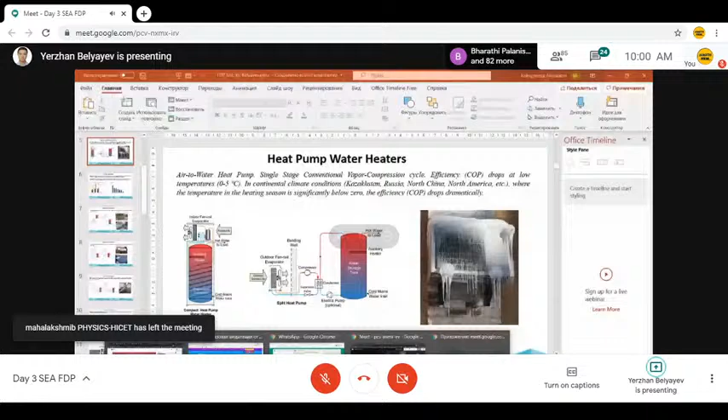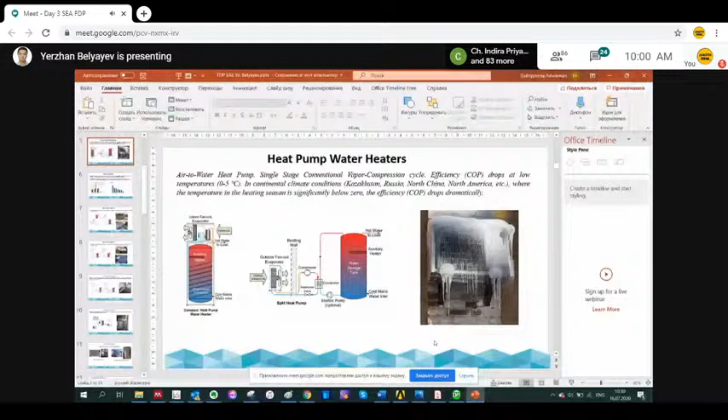Before we are starting the presentation, I would like to introduce Dr. Yerzhan. Dr. Yerzhan is an associate professor at Satbayev University, and he is also associated with Al Farabi Kazakhstan National University. He has completed his bachelor's, master's, and PhD degrees, all three from Al Farabi Kazakhstan National University, in the field of mechanical engineering, and he's an expert in turbulence modeling. After his PhD, he's done a lot of research and development activities in the field of heat pumps in collaboration with NIT Calicut and also with our institute, Hindustan College of Engineering and Technology. Initially he got funding of around 1 crore Indian rupees for the project called solar assisted heat pump.

I'll introduce you, then we can start your presentation. Initially, Yerzhan got a research fund worth 1 crore Indian rupees for the project of solar assisted heat pumps for space heating, in collaboration with NIT Calicut and also with our institute, Hindustan College of Engineering and Technology. Later, based on that research outcome, he got 3.5 crore rupees for a World Bank project to commercialize that concept, and he has done a lot of commercialization activities, though he's having some problems. So he is going to share the commercialization problems in this presentation. He also got another 65 lakhs for the development of auto cascade solar assisted heat pumps for space heating applications, in collaboration with myself, especially at Hindustan College of Engineering and Technology. He's also going to submit a new proposal on hybrid solar and geothermal heat pumps this year. So over the last 5 years he has had intensive research and development activities in the field of solar assisted heat pumps. I hope he's going to share his 5 years of research experience.

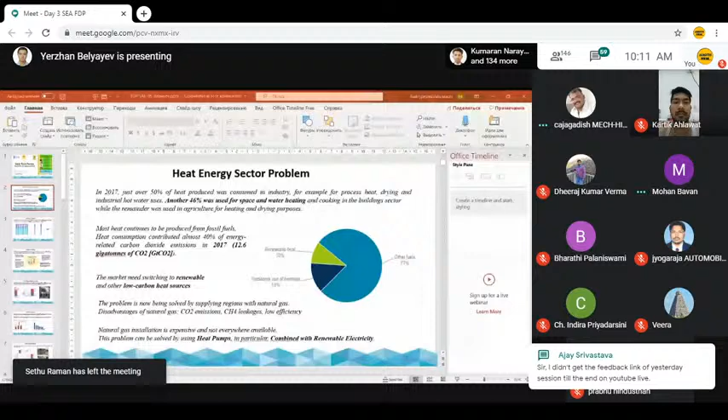According to the International Energy Agency, heat produced was consumed in industry, for example process heat, drying, and industrial hot water use. Another 46% was used for space and water heating and cooking application in the building sector. The remaining 4% is agricultural heating and drying process.

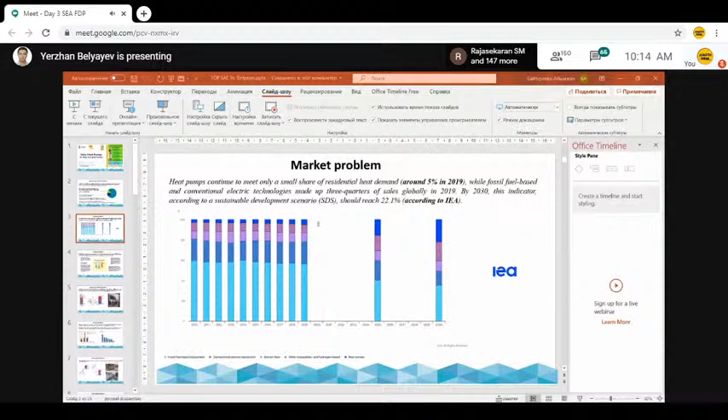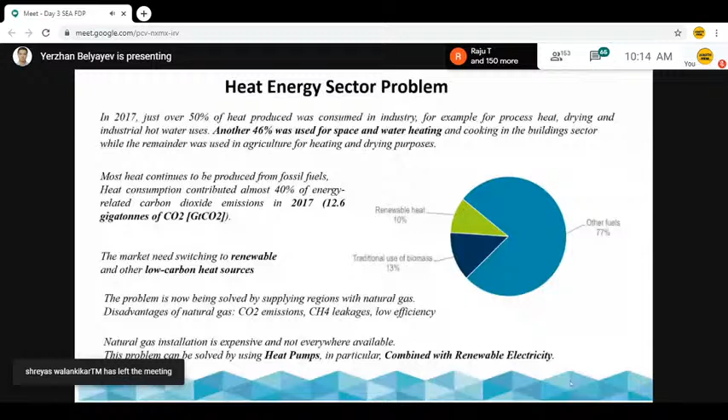So as we can see, the market needs switching to renewable and other low-carbon heat sources. As a solution in a continental climate condition like Kazakhstan, Russia, and other Nordic countries, the problem is solved by supplying natural gas, but natural gas is not available everywhere. This is a short disadvantage. The disadvantage of natural gas is CH4 leakage, low efficiency of natural gas-based boilers, and CO2 emission still. The problem can be solved by using heat pumps.

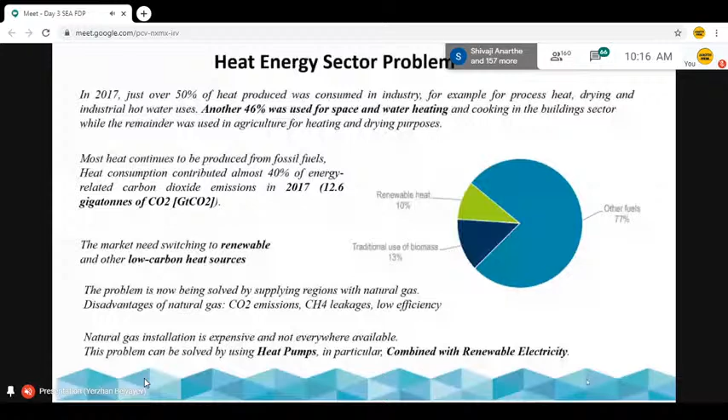The most famous is compression-based heat pumps, vapor compression heat pumps in particular, combined with renewable electricity. So according to the International Energy Agency, in 2019 around 5% of residential heat demand was shared by heat pumps.

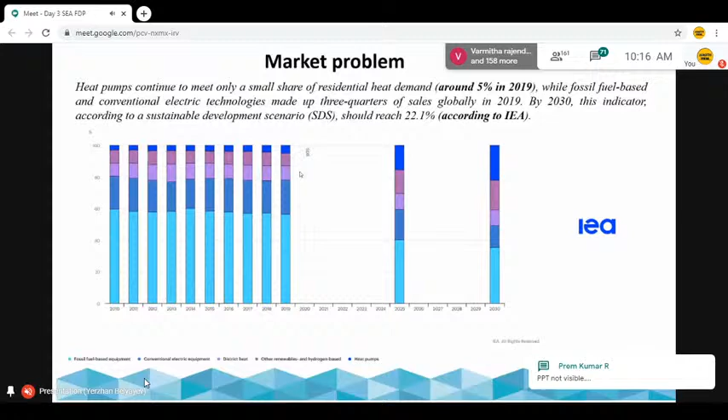It is still very less comparing to the conventional fossil fuel-based equipment, as you can see from this diagram, and other renewable and hydrogen-based heating systems and electricity-based heating systems. According to the IEA Sustainable Development Scenario, by 2030 these heat pumps should reach 22% of this heat supply sector.

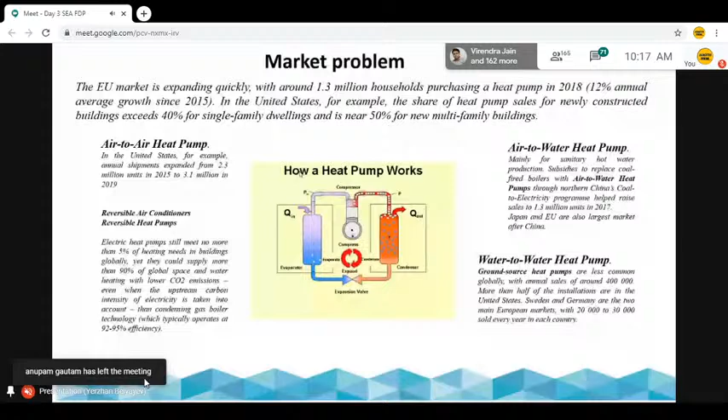So how much heat pumps are sold today in the world? According to International Energy Agency data, the European Union market is expanding quickly, with around 1.3 million households purchasing heat pumps in 2018. In the United States, for example, heat pump sales for newly constructed buildings exceed 40% for single family dwellings, and it is near 50% for new multi-family buildings.

So the principle of heat pump working, you are familiar, as shown in this diagram. Mostly heat pumps are classified as air-to-air, air-to-water, and water-to-water heat pumps. This technology is widely spread and popular in mild, warm, and tropical climate conditions.

For example, air-to-air heat pumps or reversible air conditioners supply both heat and space cooling and space heating application in warm and tropical climate conditions. And air-to-water heat pumps are most famous for water heating application, for domestic hot water for example.

According to this data, China has a coal-to-electricity program that helped raise sales to 1.3 million units of air-to-water heat pumps, especially in the north part of China in 2017. Water-to-water heat pumps are mostly used for ground source heat pumps and waste heat recovery heat pumps.

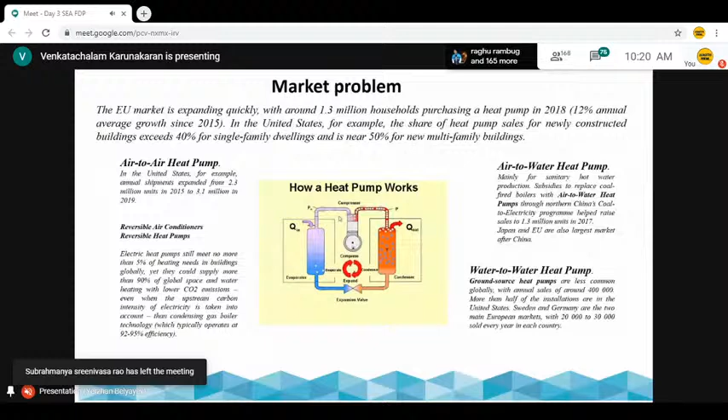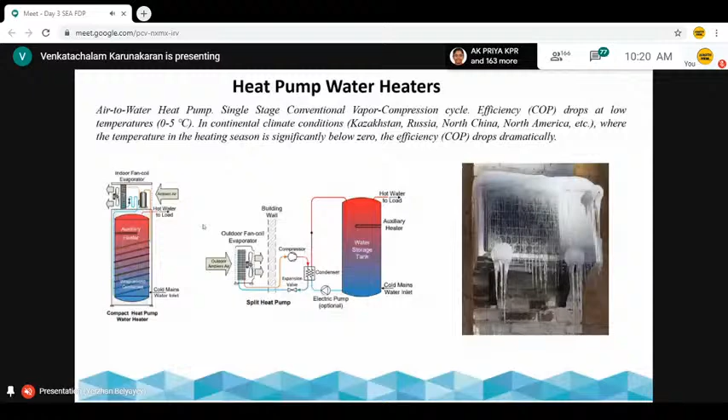So the disadvantages of this single stage vapor compression cycle, air to water heat pumps, is it cannot deliver heat more than 50 degrees in low ambient temperature, below -5 degrees. So mostly in continental climate conditions like Kazakhstan, Russia, North China, North America, in winter heating season, ambient temperature drops dramatically. It can reach -40 or even less in north parts of Russia. So in that case, the single stage heat pump cannot deliver heat with appropriate efficiency. Efficiency here means COP.

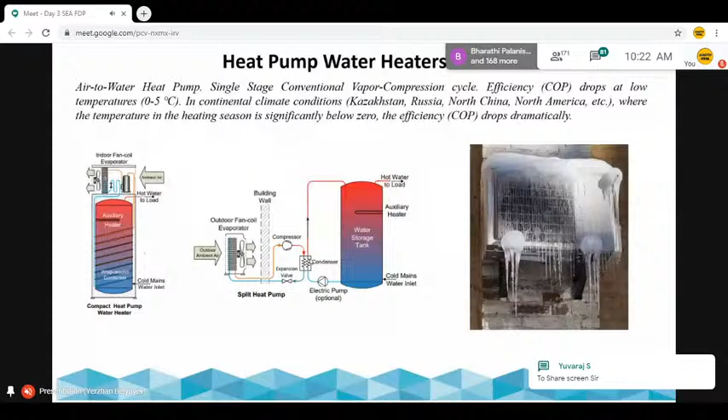So as we can see, single stage heat pump is not applicable during heating season in Nordic countries, but it is quite popular in mild, warm climate conditions. For example, in the north part of India, where temperature in winter does not drop below 0.

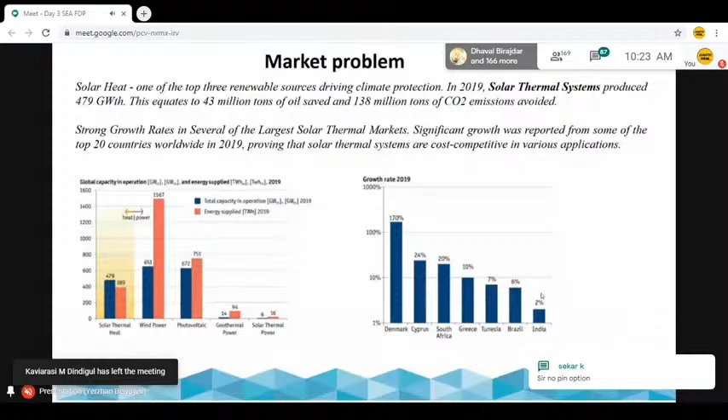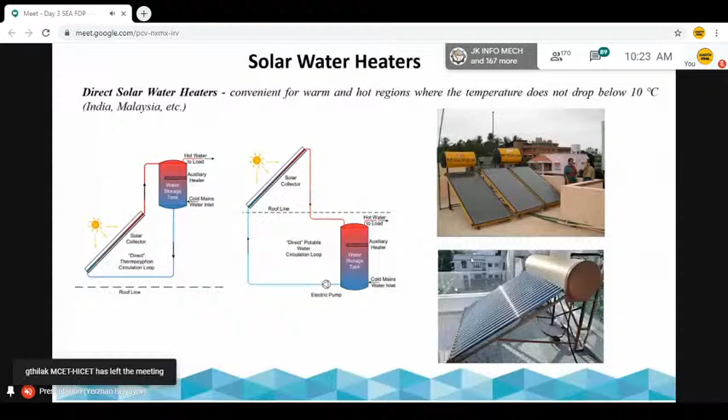But in Nordic countries, with northern climate conditions, we use indirect solar water heaters with two working fluids. The first loop mostly uses an antifreeze solution with an intermediate heat exchanger, which can be mounted into the hot water storage tank. So this fluid is not mixed with the hot water in the tank - mostly this fluid is an antifreeze solution.

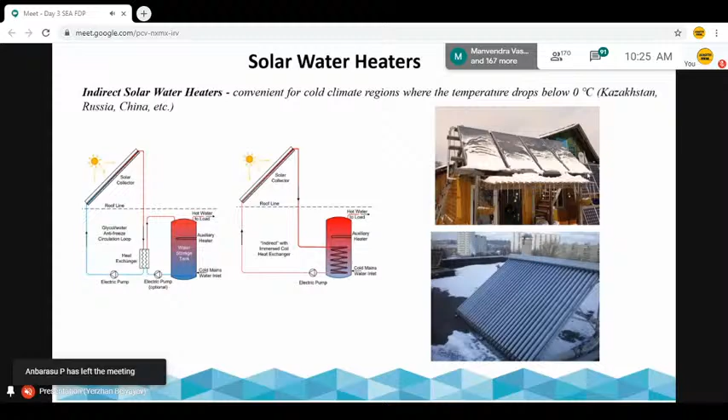According to our observations, the flat plate solar thermal collector is the most convenient and most reliable technology, but it has shortcomings in the north countries with heat loss, mainly convective heat loss due to ambient temperature and wind. But vacuum type solar thermal collector is a good option for Nordic climates.

So how can we use both solar thermal technology and heat pump together? We can boost heat pump efficiency, what we call the seasonal performance factor, using solar thermal collectors. In this case, we can connect solar thermal collector directly - it's a direct expansion heat pump, or indirect expansion heat pump - so the solar loop can be the first stage to increase that low grade heat.

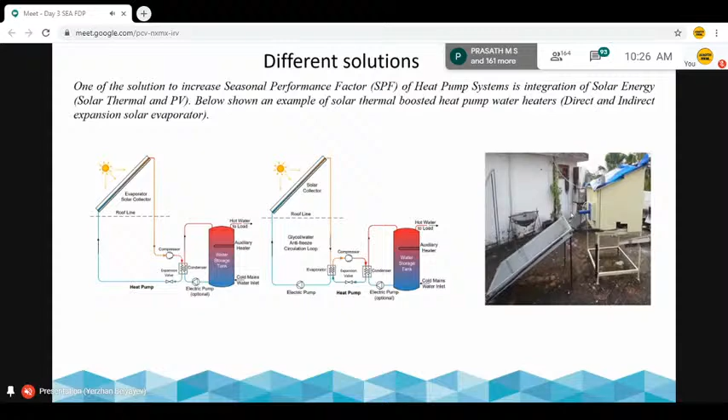At National Institute of Technology Calicut, we started this work in 2015 with Professor Mohanraj and Professor Jairaj. As you can see, this photo shows direct expansion solar assisted heat pump. In our case, for Nordic climates, for continental climates like Kazakhstan, we suggest using both technologies - solar thermal collector water heater and heat pump water heater - in parallel. We combine these two technologies, not make it hybrid.

Combination of these technologies can increase the seasonal performance factor, especially for South Kazakhstan regions, where warm days are more than cold days in the heating season. But still, for a single stage vapor compression cycle air to water heat pump, we cannot deliver the required useful heat in extremely cold conditions. And solar thermal collectors still depend on solar radiation availability, so only during daytime can we store heat in the water storage tank and use it for domestic hot water application, but for space heating application it is not sufficient.

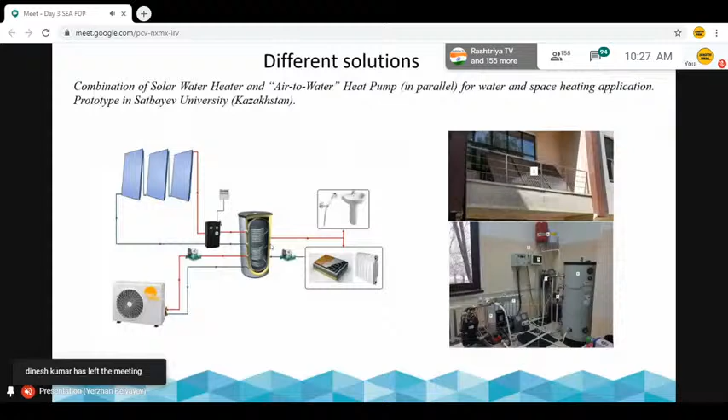So we tested solar water heaters in the southeast part of Kazakhstan and the north part of Kazakhstan, the capital. The efficiency of the solar water heater in the south part is, of course, much better than in the north part. Here we face a problem with convective heat loss in the flat plate collector that decreases the efficiency of the system, because the north part is windy - even in summer, with available solar radiation but highly windy conditions, heat rejection is less.

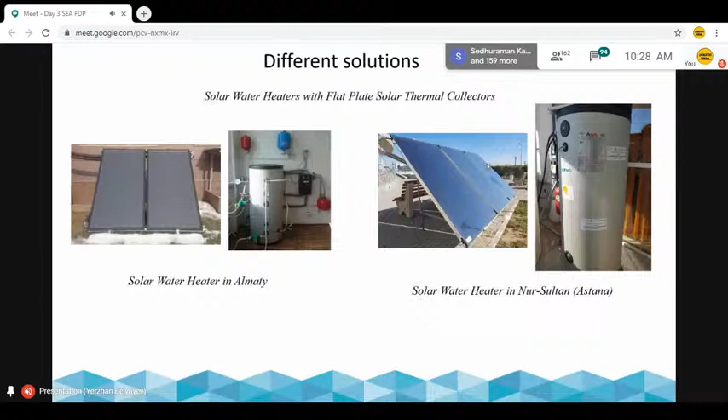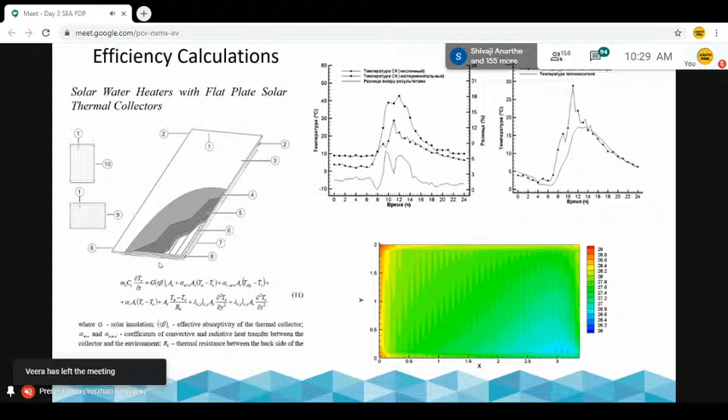So that's why for North countries we recommend using that vacuum type collector. We made that efficiency calculation according to the heat balance equation and 2D heat conduction equation. The details of this calculation you can find in our papers and reports, and I can share with you later if you're interested.

And we built another heat balance equation for solar water heater. This is our own code, a simple code for the heat balance equation, and we can show here the theoretical heat that can be given by that solar water heater.

But in practice, we can face different problems. Especially, we recommend not to mount the system with the hot water storage tank and solar thermal collectors at a distance exceeding 3-4 meters. In this case, we can extract more heat if it is less. If the distance is large, we extract less.

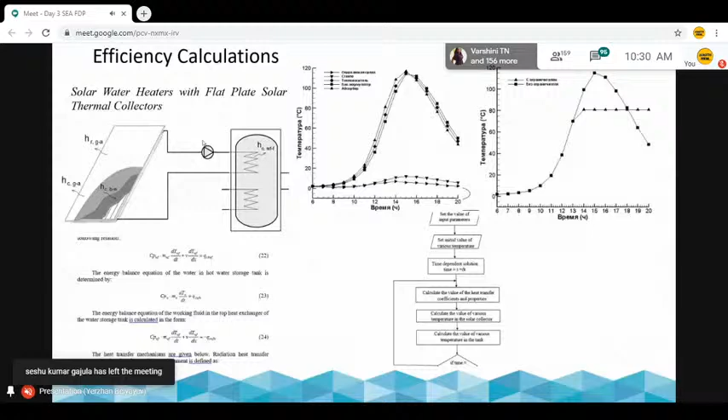Also, we use a TRNSYS 18 simulation for a combined solar water heater and heat pump water heater for the Nur-Sultan condition, that Nordic Astana climate. And here's a graph for one month's efficiency in January, the cold case.

Here's the annual efficiency. As you can see, in summer we can get the required heat, but in winter heating season we cannot reach the required heat, and you can see in the January condition, solar thermal collectors do not provide that much heat.

In this case, we recommend using solar water heaters with an additional booster, additional heat pump, or conventional natural hydrocarbon-based boiler booster, since even heat pumps have a shortage. So for Nordic countries, we recommend some other heaters.

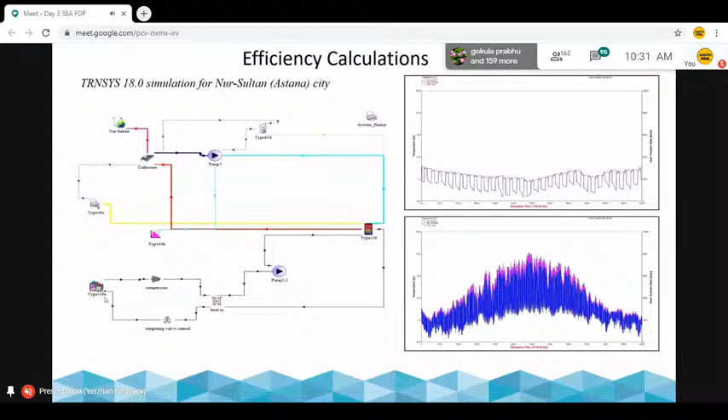Here we make experimental testing for the south part of Kazakhstan, a conventional single stage air to water heat pump, with R290 and R410A refrigerant. Here COP at -8, we can reach a good COP even at -8.

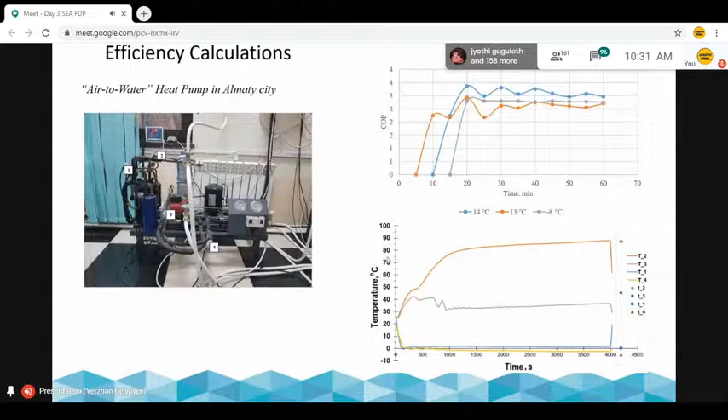So for cold climate we can recommend these refrigerants at a temperature not below -7, -8. As you can see from the graph below, the COP at -8 is more than 2.5. If we decrease the temperature, accordingly the COP decreases, and there is no usage of this heat pump in these cold climates.

To solve this problem, we propose this solution. The solution, of course, is a combination of these technologies. Especially we can combine three technologies: the heat pump, conventional natural hydrocarbon-based fuel heaters like a gas boiler or coal furnace, and solar thermal collectors.

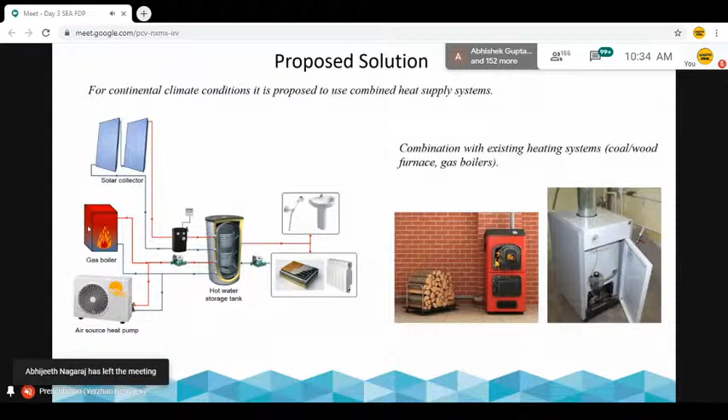Another solution is instead of using these hydrocarbon-based boilers, we use a two-stage cascade heat pump, air to water heat pump. The idea is to sequentially connect this vapor compression cycle to heat the water. Of course, this is theoretically a very good idea, and from a research and development point of view, it is a very good concept.

But from a commercial point of view, of course, it has shortcomings. According to that calculation, which we built using the engineering equation solver, we tried to simulate the intermediate heat exchanger and different types of intermediate heat exchangers for the cascade system. This configuration is the most efficient among these different cascade configurations.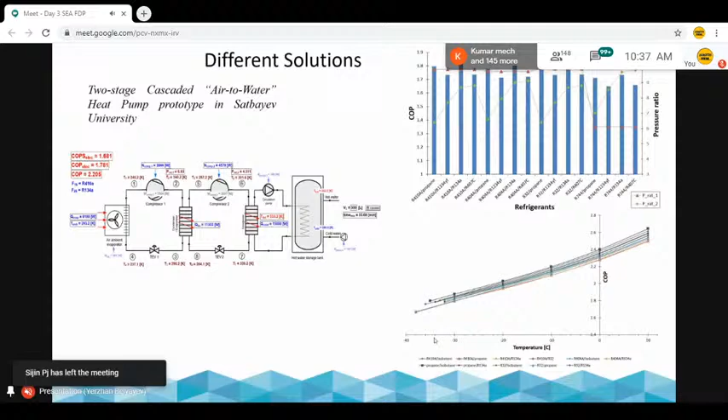Of course, it is a good COP, but it is a relative parameter. For example, European standards require COP not less than 3, or not less than 2.5. The standard is changing, and every year heat pump improvement is going on, so a COP of 2 is not good for the European market condition, for example.

As a research and development concept, we suggest, together with Professor Mohanraj and Professor Jairaj, a direct expansion two-stage cascade heat pump. So instead of using an air source evaporator, we use a solar thermal collector. We made this calculation as well, and got a COP of even 1.8 at -30.

Comparatively it is good, giving a good condition, but standards do not allow this level of COP, and it remains an interesting concept from a research point of view.

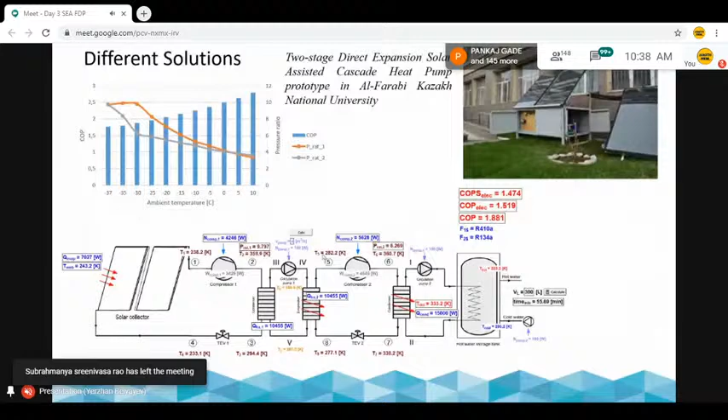To avoid these two compression cycles and accordingly the electricity consumption for two compressors, Professor Mohanraj and I suggest a new solar assisted auto cascade heat pump configuration.

So what is the idea? The idea is using a binary refrigerant mixture initially, and using only one compressor, with different heat exchanger configurations to save this temperature range for cold ambient temperatures, and improve heat delivery rate and COP. So we reach a COP of 2.7, theoretically, for refrigerant mixture R32 and R134A.

We still cannot build this. We haven't built this configuration yet, but it's under process, and in the near future we'll build this configuration for research and development purposes.

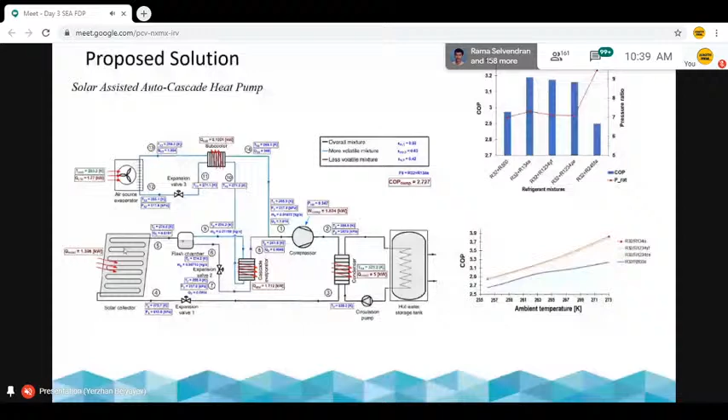Also, this system is recommended for water heating applications only, domestic water heating, because solar energy is available only in daytime, and we cannot reliably supply heat to Nordic countries.

We propose, as a solution, the combination of a conventional heat pump, air-to-water heat pump, with a gas boiler. This is a very viable and commercially viable concept today.

Households and buildings already have heating systems based on natural gas or coal in our countries. So if we can give them the new configuration to reduce CO2 emissions and increase the efficiency of the system with heat pump integration, it will be good in terms of economy, environment, and sustainability. So we're working on this, and results we can show later.

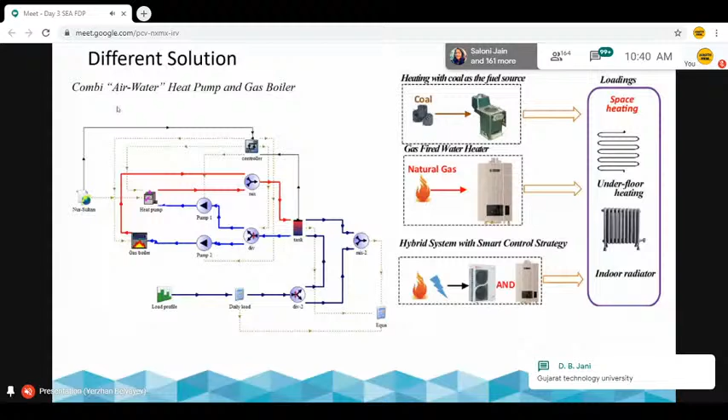As for solar energy integration with a heat pump, another concept is solar PV integration with a heat pump. So solar PV with a DC inverter compressor in an air-to-water heat pump or air-to-air heat pump, or solar PV air conditioners.

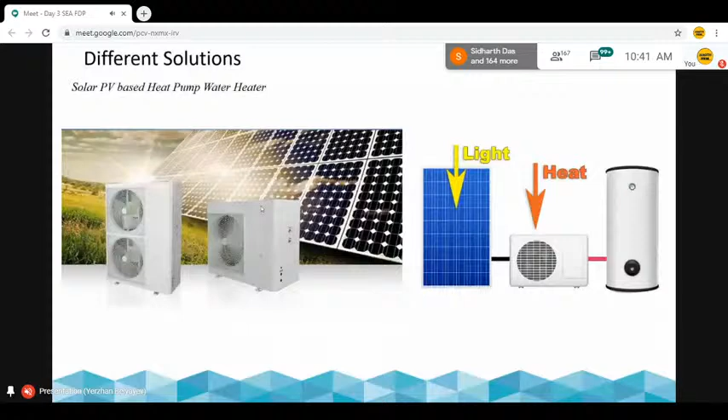It is very popular in tropical countries, and I think from a commercial point of view it can be viable in both Nordic and southern countries. Also, we don't have results on this concept yet. It can be a future research and development idea.

So another very viable and commercially stable concept, technically and commercially, is the water-to-water heat pump. We made a simulation, and we can reach a COP of more than 3.4.

Water-to-water heat pump can be utilized to extract heat from a low-grade ground source heat pump. We are now working in this direction together with Professor Mohanraj and European partners from European universities. But this system is expensive because ground source heat exchanger drilling cost is expensive, and research needs to decrease the price of drilling and installation cost of these ground source heat exchangers.

As you know, ground source heat exchangers can be vertical or horizontal type. For North continental climate conditions, it is recommended to use vertical type heat exchanger because, as you can see, the Earth's temperature by depths after 15 meters cannot be changed. There is no changing in the temperature, so we can use this low-grade heat for the heat pump.

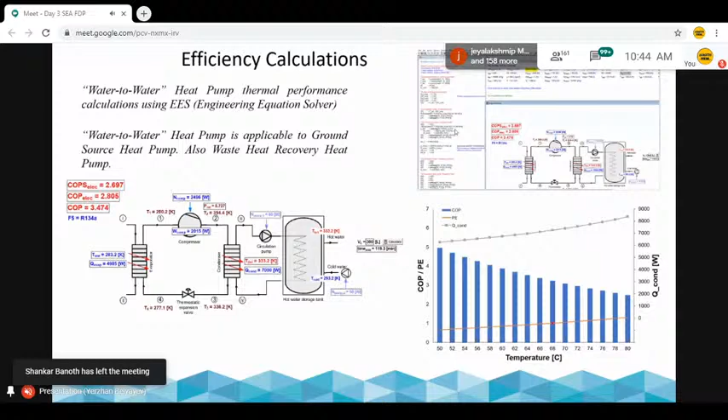But this system is reliable and sustainable for the Nordic countries, and COP for that water-to-water heat pump block inside the building can reach a higher rate. So that's why we recommend this technology for these regions.

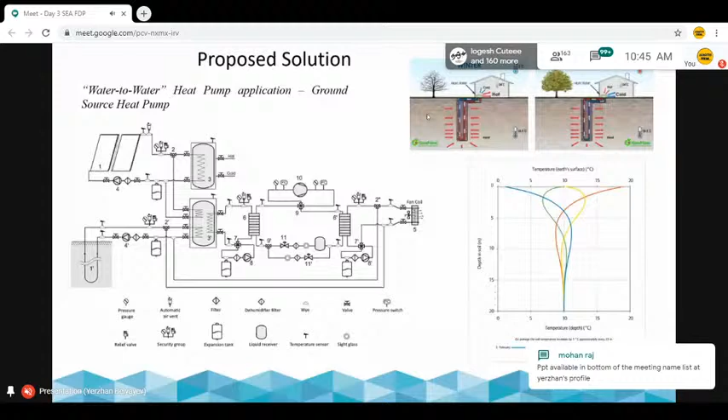Of course, for a single house, in terms of commercialization, it is expensive. So for district heating application, that system can be viable in terms of economy as well.

Also, water-to-water heat pump can be used for waste heat recovery. So waste heat can be generated by large industrial scale sources, from the industry, from wastewater, from big refrigeration units for ice, from grocery stores, from ice skating rinks, and so on.

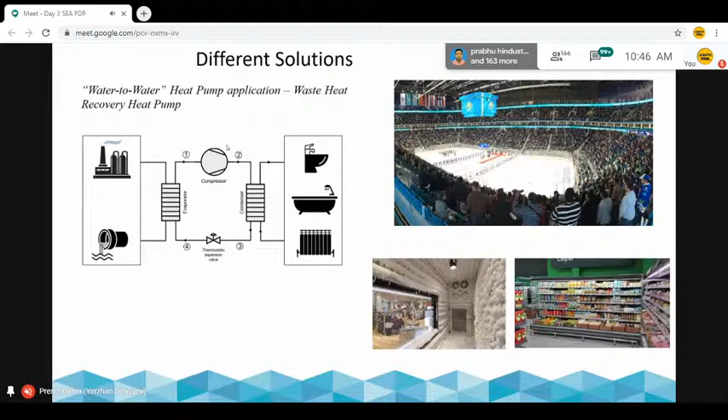For small scale applications, a small individual house cannot generate so much waste heat, so it is recommended to use this water-to-water heat pump in industrial scale. So what are the market opportunities for the heat pump?

That market size in Kazakhstan, it is every year 1 million private houses, excluding agricultural facilities and warehouses. Market growth is 15% of annual house building, new house construction, and less than 56% of Kazakhstan does not have availability to natural gas. There is no electricity shortage because we have a lot of coal-based power plants.

Renewable electricity market is growing, and the combination of this technology with renewable electricity makes it more sustainable.

What kind of commercial barriers exist today? I talk about the Kazakhstan case. As I said, Kazakhstan is a resource-rich country, and we export a lot of oil, gas, and natural resources. Of course, the price of hydrocarbon fuels here is cheap, I can say it is the cheapest among the world.

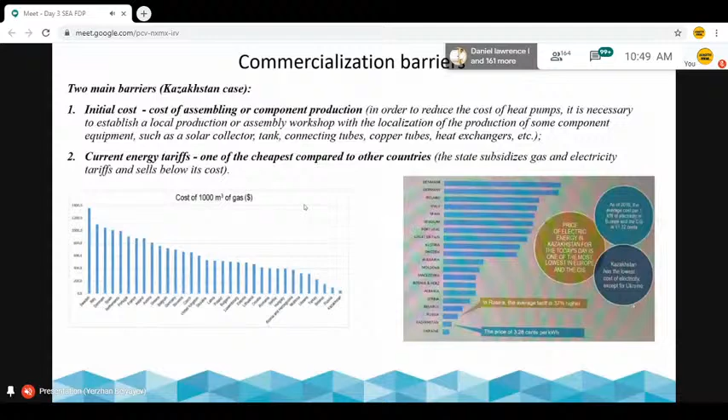If currently the government makes subsidies to tariffs - natural gas tariffs, electricity tariffs - for us it would be convenient to decrease the electricity price but increase the natural resource price. That would make heat pumps and other renewable energy systems competitive with current systems.

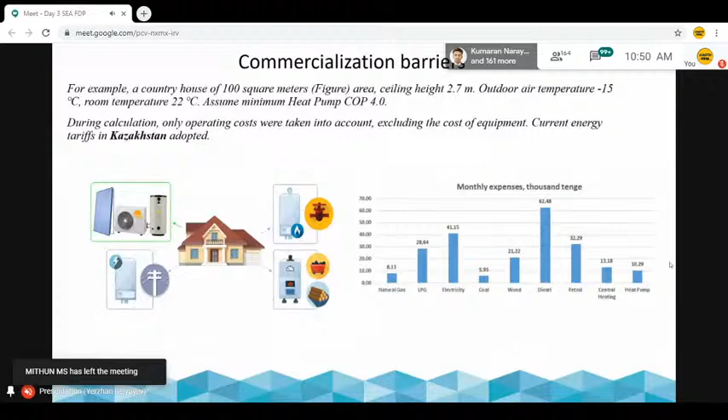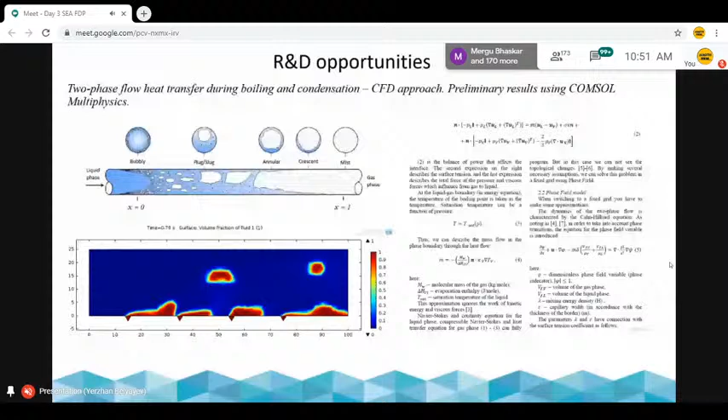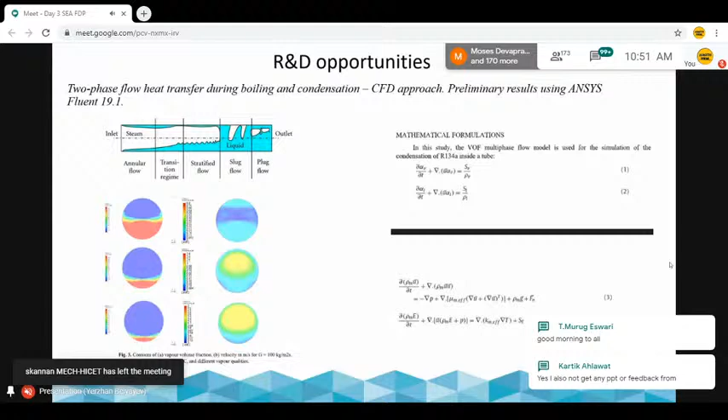Further research needs: first, increasing standards of heat pump efficiency, increasing energy efficiency, and environmental aspects of existing hydrocarbon-based heating systems for continental climate.

This means that we cannot avoid the existing hydrocarbon systems, but we can increase their efficiency because these systems are reliable, especially in cold countries. So we can increase the energy efficiency of ground source heat exchangers.

Restoration of soil properties by using excess heat of solar energy - solar seasonal thermal energy storage research, especially for continental climates - reduce the cost of heat pumps in comparison with existing heating systems, in particular ground source heat pumps.

Search for the best combination and hybridization of configuration of vapor compression heat pumps with existing heat supply systems. Search for new solutions based on absorption heat pumps, improving heat exchangers, and other components.

For example, improving the vapor compression heat pump cycle with an ejector, with other new combinations with other systems. And of course, two-phase flow heat transfer simulation and investigation of boiling and condensation - this can be CFD research and experimental approach, and so on.

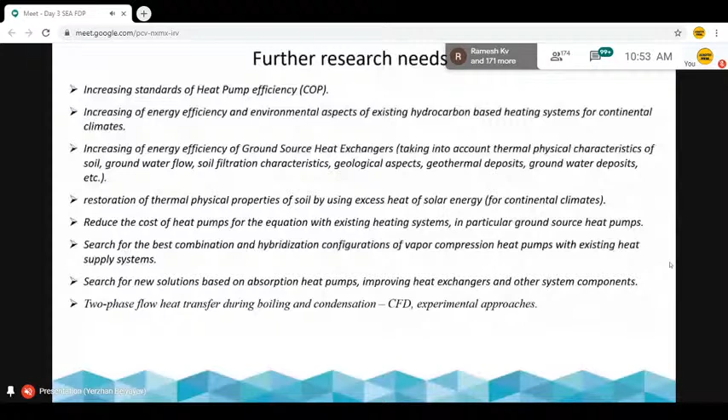And conclusions - conclusions made especially with an accent on the commercialization point.

Solution for one: for continental climate condition, the best solution in terms of efficiency, environmental friendliness, and less payback period is a solar assisted ground source heat pump, water-to-water heat pump for district heating application. Second, water-to-water heat pump with best energy efficiency, environmental aspects, and less payback period is for industry and industrial refrigeration unit, waste heat recovery application.

These are my suggestions, maybe if you don't agree you can later tell your opinion. Small heating capacity air-to-water heat pumps for water heating application are best in combination with hydrocarbon fuels for continental climate. In combination with solar thermal collector and solar PV, it is good for any climate condition, especially solar PV and air-to-water heat pumps. I think it is good for the Indian case, Malaysia case, and other tropical monsoon countries.

Of course, during monsoon your solar system efficiency drops, but because you have hot ambient conditions, I think solar thermal water heaters and solar PV based water heaters are the best in your countries in terms of commercialization. Of course, there are a lot of other technologies like concentrated solar collector, but it is difficult, it needs more operational cost, it is expensive for those systems. But these systems are based on existing, proven, commercially viable systems.

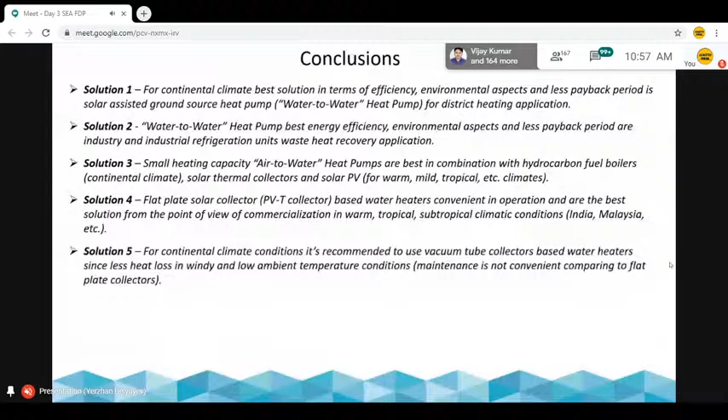So this is my vision and our results which we have today. If you have any questions, please, you can ask.

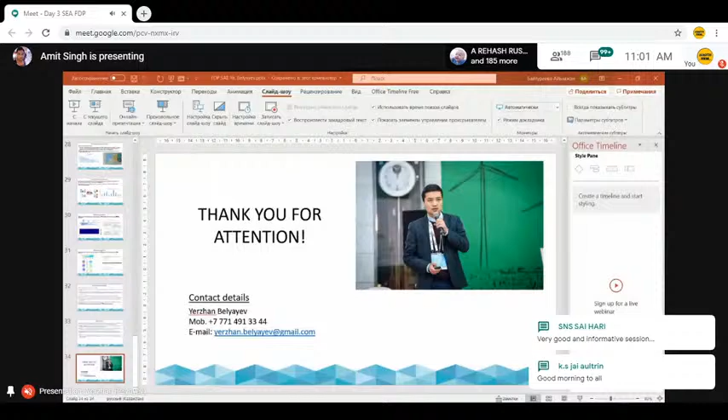I hope he's going for one more new project called geothermal assisted ambient solar assisted heat pumps. I think he is going to submit this proposal along with myself as a co-principal investigator. He's working in a high reputed government funded university in Kazakhstan, so he has a good chance to get the research funding, and that outcome will also be useful for the Kazakhstan climatic conditions.